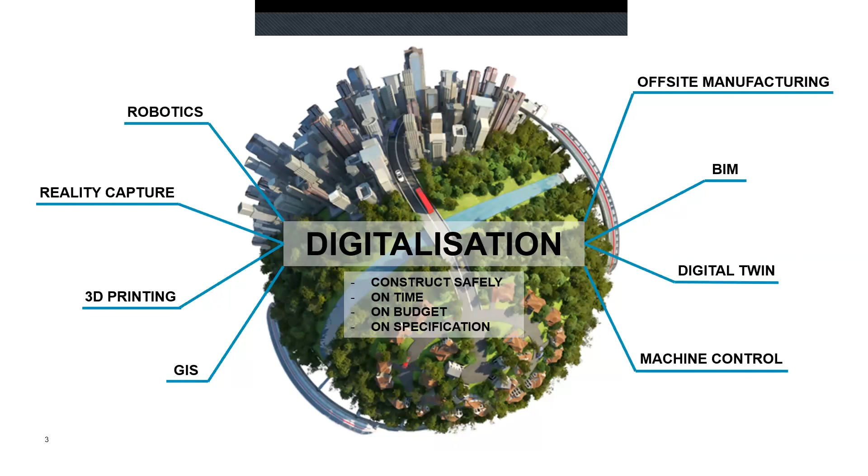But actually, as an industry, are we really digitizing? Are we investing in digital technology? So the question is, where does the construction industry rank in terms of investment in digital technology?

This was from a study from a few years ago. They analyzed 22 worldwide key industries, and ranked them on their typical yearly investment in digital technology. I don't know if you'd be surprised to hear that construction came 21st out of 22nd in terms of investment in digital technology. For an industry that has probably long underperformed when it comes to efficiency and delivering on budgets, this seems like a very, very low ranking.

To put construction in my opinion, and when I talk to my peers in the industry, this ranking should be much higher. Construction companies and the industry itself should be looking to invest more in digital technology, to modernize, to digitalize. But this is all about change, and it's about making changes within our industry, within organizations, within projects that I work. And ultimately, change is hard. It's not that you can go out and buy something and change immediately happens.

One of those ways we can do it is to look at new digital technology. Some of those, laser scanners or machine control devices, will help organizations to digitize.

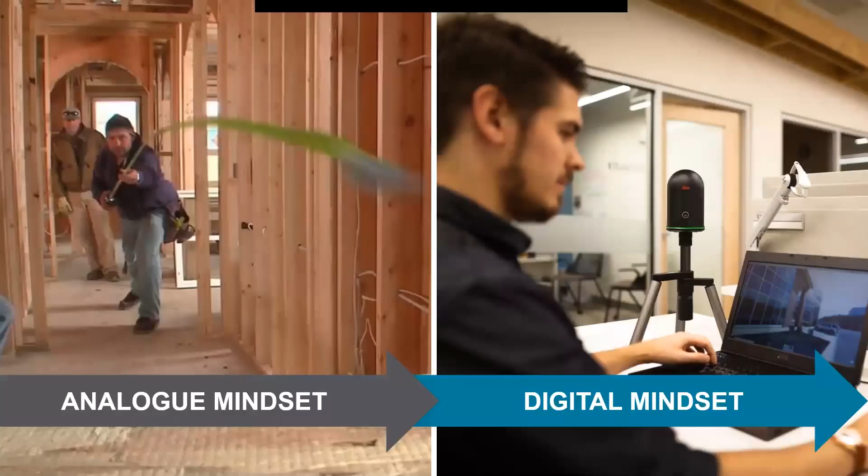So it's about moving from old ways of thinking, old ways of working, an analog mindset, to a more digital mindset. And as I said, this is about change—as much a mindset change inside people, inside a company.

If we look on the left, this person is trying to measure quite a long distance with a tape measure. Would you trust that measurement? Would you be able to understand exactly what he is measuring?

With digital technology like 3D laser scanning, like reality capture, which I'll talk about later in this presentation, we digitize this process so we can take smart measurements, smart decisions, smart information from the site, connecting these two worlds together. That's what we're talking about—these two worlds.

But how do we dynamically connect this to the real world? Because we have this chasm of lost information—we have a digital office, but are we using that smart digital process and digital information in the real world? How do we connect the office and the real world together to create almost a digital reality for our projects and our industry to use?

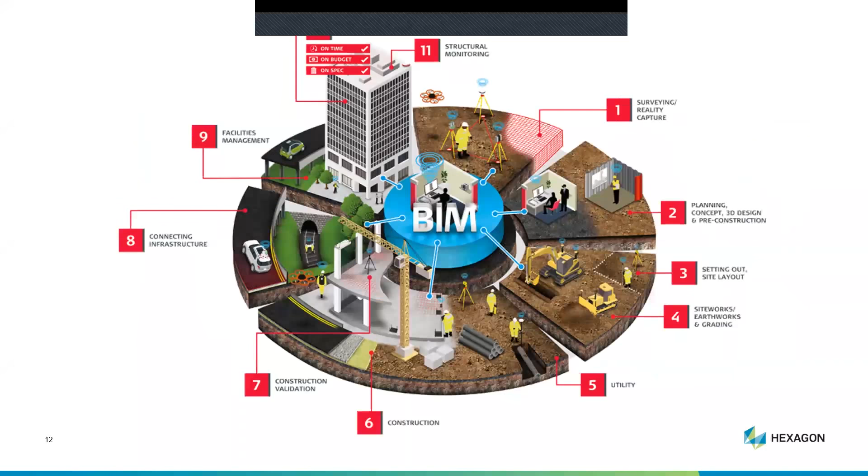A lot of this technology is already being used today, and it's about joining the dots between them and the digital office that we're starting to create in the world. With Leica Geosystems and Hexagon, we have technology, processes and workflows that allow you to connect the whole workflow from end to end.

So if we look at the top, we have phase one, getting the lay of the land. We have technology that allows you to capture that reality, all the way through to phase four, where we start using machine control to sculpt the land into the areas and volumes we need to construct our environment. Then we go to phase three, where we set out or stake out and position 3D data in the real world so we can put it in the right location and reduce error.

All the way through to facilities management, where we hand over an accurate 3D as-built digital data set of your project. And all this information, even though it's on the site, in the field, we can connect this to your BIM GIS digital database that sits in your project core in the office. It's a complete end-to-end workflow.

Going back to why do we want to digitize, why do we want to adopt new technology? Ultimately, it is about being able to deliver projects on time, on budget, and on specification. If you can look at any new process or technology and it delivers on more than one of these things, this will help you become more digital and deliver your projects to a higher standard.

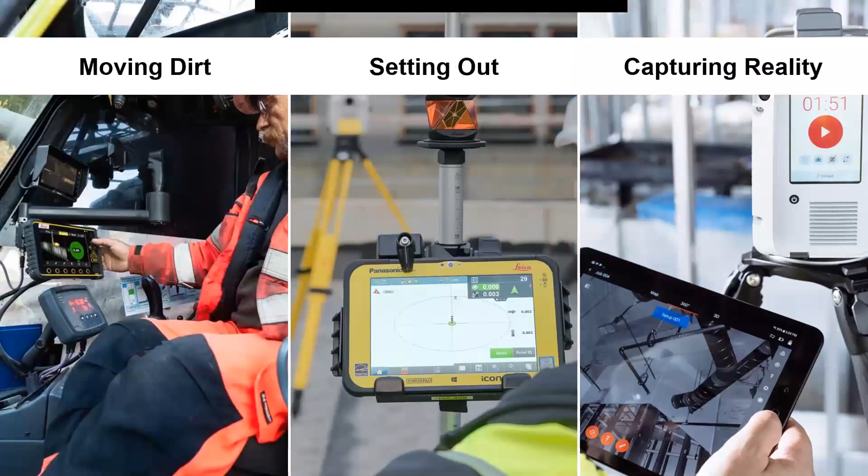So there are three categories I want to talk about today, and hopefully you'll learn something about new technology that isn't five to ten years in the future. This is technology that has either been around for quite a number of years, and most of this technology is now being adopted more and more all over the world to digitize what were analog workflows into more efficient, higher quality deliverables for customers.

Firstly, I'm going to talk about moving dirt, focusing on a technology we call machine control. Maybe it's something you've never heard of before. Basically, think of any construction site, whether it's a building, pouring concrete, heavy construction, building a bridge or a road - the project is using excavators, bulldozers, these heavy machines that allow you to move dirt and objects around your site. Up until maybe 10, 15 years ago, this was a very labor intensive, labor focused workflow.

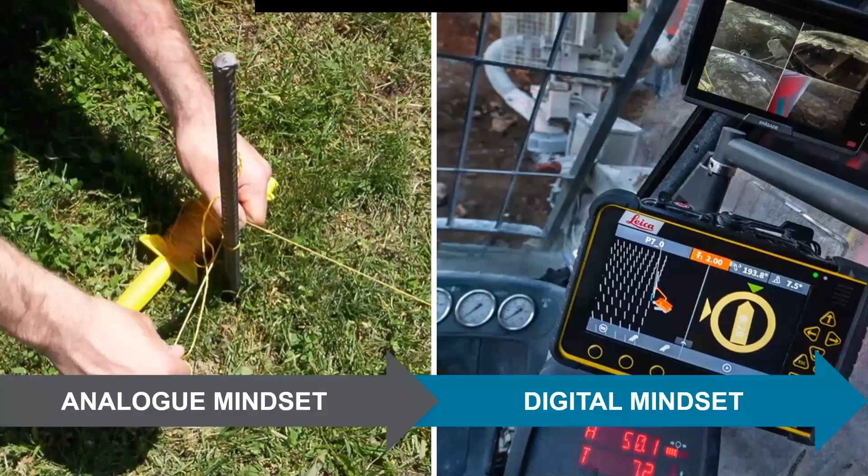But now, with the adoption of digital technology, if we look on the left, we had to actually show the human operating the machine where they had to dig, where to put their bucket. This meant people had to go out and put stakes in the ground. They had to be around the machine, and the person had to visually understand where he was putting his bucket, where he was digging, where he was moving dirt or equipment around.

Nowadays, with machine control, we can install inside these machines guidance systems, almost like a computer game. We attach sensors to the machine, and we're able to take 3D and 2D digital data into the machine. This screen you're seeing on the right-hand side basically shows the operator exactly what they need to do. Why do we need this? Well, it's ultimately making sure that what's constructed on site exactly meets the design, and people are not wasting time digging in the wrong location or trying to find where exactly they need to dig or move dirt.

All this kind of thing can be shown to them on a very easy to understand screen. So what does machine control actually look like?

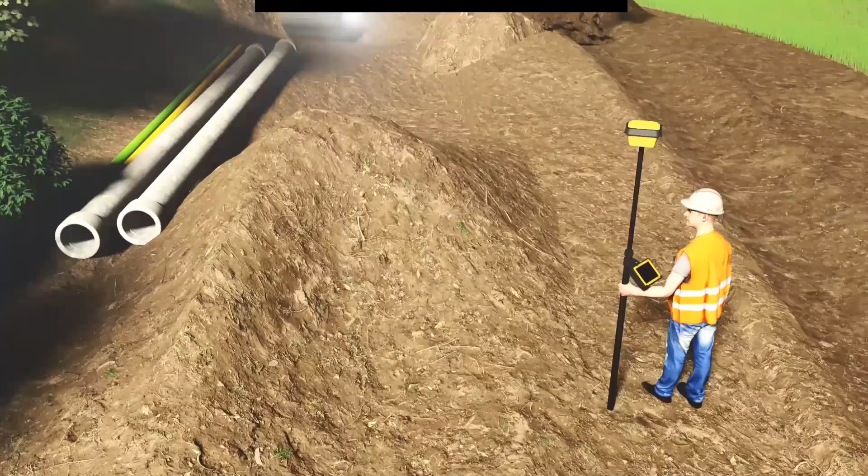As I said, we install sensors that allow you to understand the movement of the machines. This includes GPS, GNSS, so the machine can actually understand its location in the world. In the office, you have these amazing 3D models. We can take those 3D models and send them directly to machines. The person operating the machine will then see the 3D model on his instrument, and even the people surrounding him helping him out.

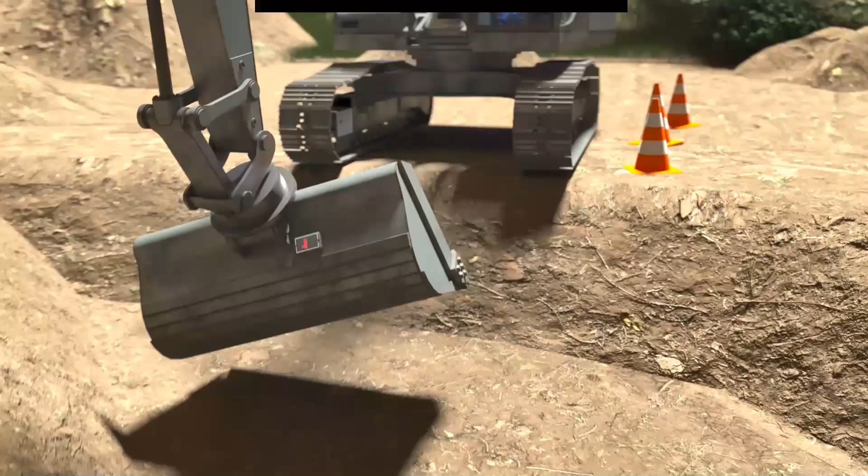And the sensors will guide the operator to dig in exactly the right location. Ultimately, this is about efficiency and safety. Being able to guide someone to dig exactly as much or as little as they need allows our projects to save a huge amount of money and time by being much more accurate with the amount of dirt they're going to dig and move.

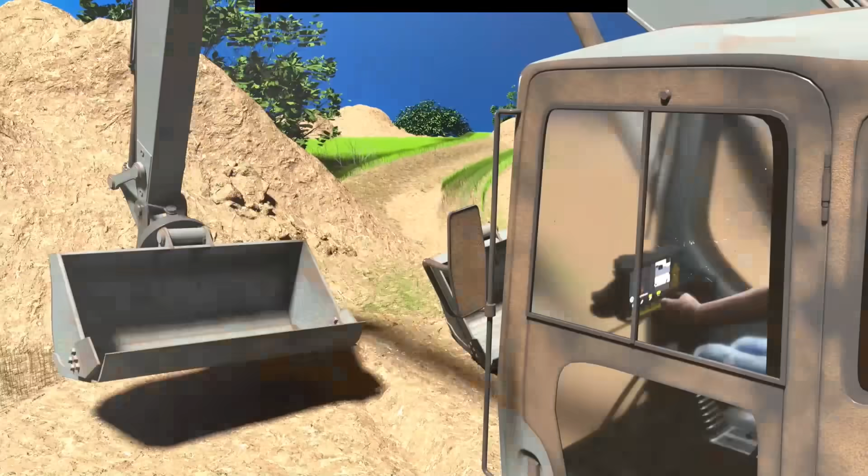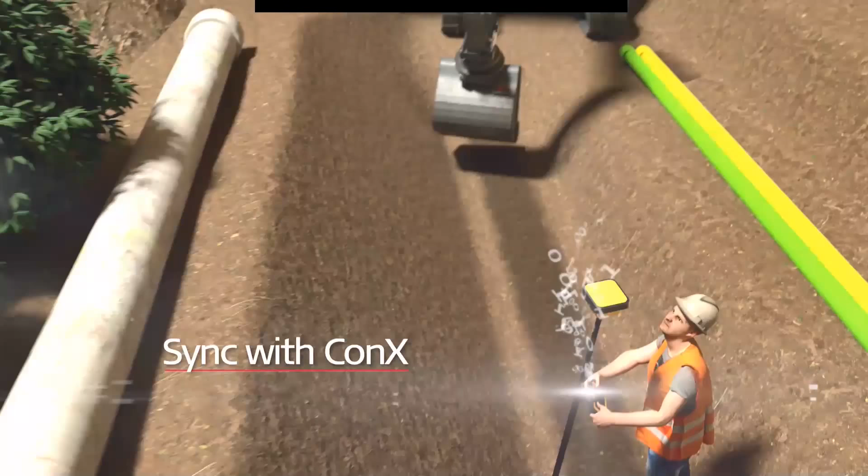This is an example for an excavator, but these machines can be installed on piling rigs, on cranes, on bulldozers, on pretty much any sort of construction equipment, allowing you to save huge amounts of time and effort on these huge construction projects. And it doesn't necessarily need to be huge - these can be installed on a single excavator or digger.

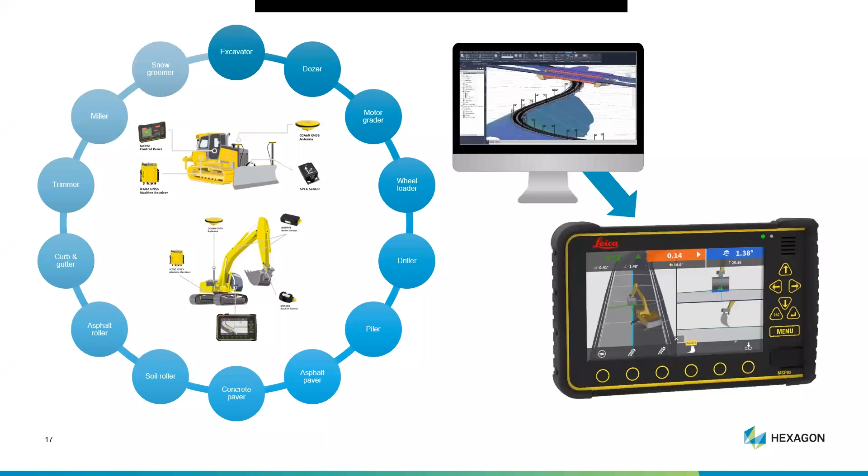As you can see on the right-hand side, we take data from packages like AutoCAD Civil 3D, Bentley MicroStation, any of the 3D standard packages. We can take that data and send it to the operators in the field, and they can start moving, excavating, and constructing exactly as planned, saving time and effort.

The next one I want to talk about is called setting out or staking out. Again, this is about the fact that we've taken our data and now have a digital representation of our project. We want to construct that project in the real world - how do we ensure we do that? If we're using AutoCAD, how do we take these drawings to site to make sure we construct in the right location?

If we've got 3D models now, maybe modeling in Bentley or Autodesk or Revit, and we want to take those models to site, how do we take them to site and use them on construction sites to make sure we construct exactly where we have to, avoiding any costly mistakes?

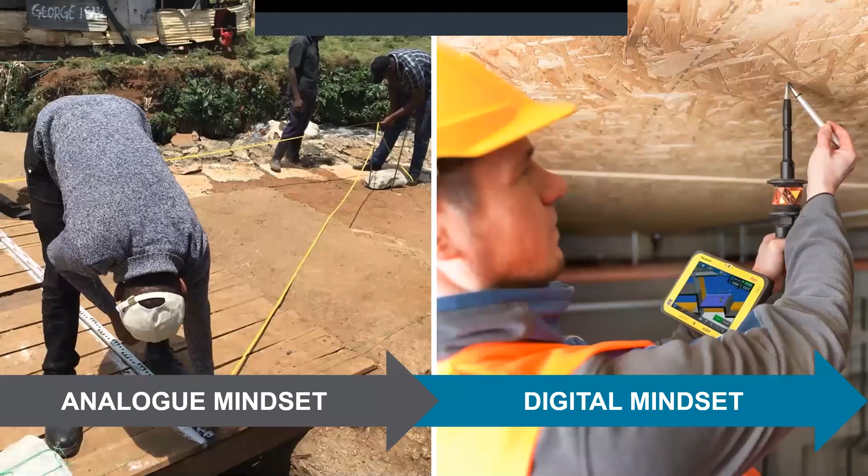If we look at the analog mindset, today on most construction sites, wherever you are in the world, tapes and strings are commonly used to do this setting out, staking out, or laying out process. What they're doing is essentially calculating in the field exactly where things need to be dug or installed in the real world. Normally this is done through a quite labor-intensive process of tapes, strings, and calculations.

What does this lead to? Well, it often leads to a lot of mistakes. It often leads to the fact that if one of these pegs is removed, you have to do the whole staking out process again.

Nowadays, with new digital technology, we can use things called robotic total stations. These are basically devices that allow you to take digital 3D and 2D information and actually position things in the real world based on this robotic total station. In the picture on the right, you see a guy holding what looks like a red reflective object.

This is called a prism, and he is being guided by the robotic total station to locate a hanger into this roof structure. He is now within a few millimeters of locating where this object needs to be installed, and this is all driven by the robotic total station. There's no need for tapes or strings. The total station tells him exactly where he needs to go.

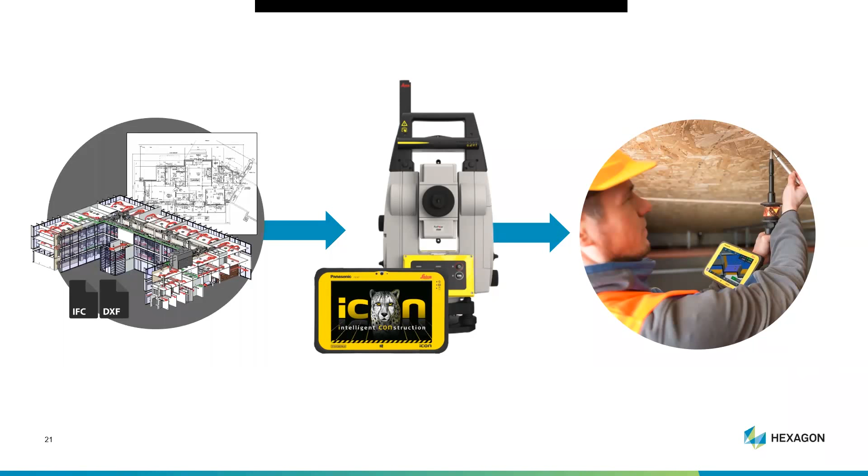For example, an MEP company - mechanical, electrical, plumbing - may have to install thousands of hangers to hold these devices, and they have to locate thousands of holes on the ceiling. With this device, you can tell it to point at every single location so you can drill as you go. If it's labor intensive, there's a high probability of errors - it's normally inaccurate and problematic.

In the middle, you can use a manual total station, where you need two people to do the setting out. But on the far right is the robotic total station. This device will point you exactly where you need to be. It's a 50% reduction in labor, and you'll be far more efficient and accurate when setting out 3D and 2D data in the field.

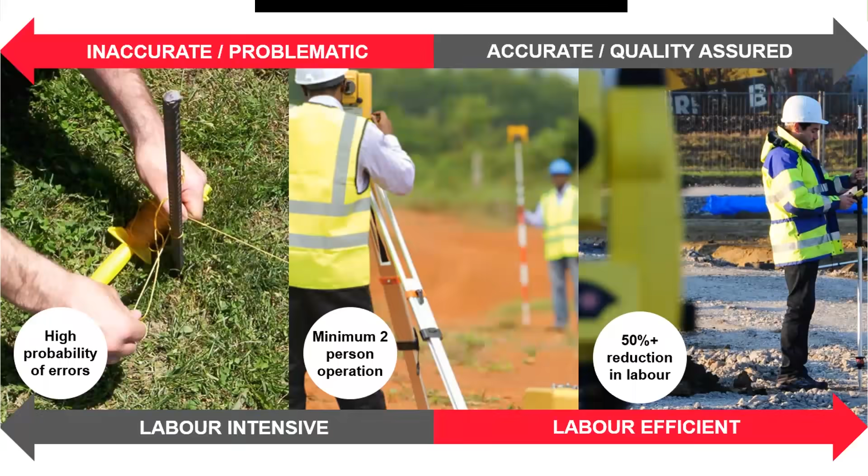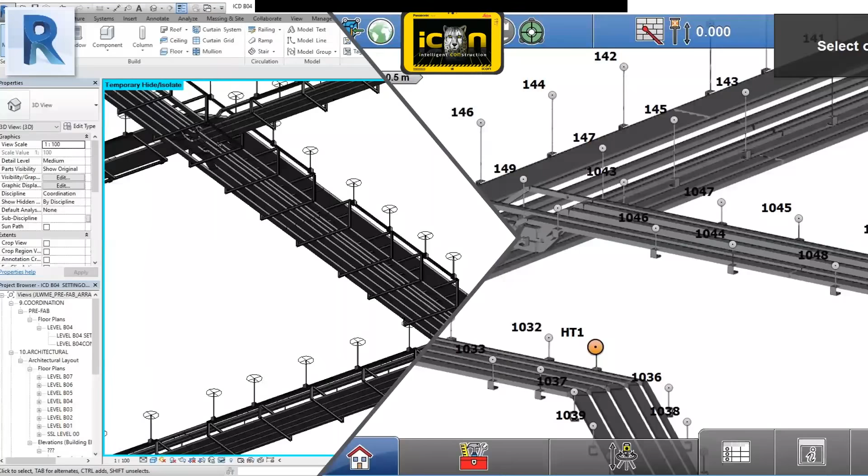On the left-hand side we have a model inside Autodesk Revit - an MEP model - and you can see these weird crosses on top of the hangers. These are layout points. We can take all that information via USB or a cloud service and send it to our instrument in the field. There, we can see that data in 3D and start setting out directly from the 3D model. We do not need any intermediary steps.

We can get to the information we need to start setting out and laying out information on your construction site as quickly and efficiently as possible. If there are any changes, that data can be resent to site, and these guys can get the new information and continue setting out without losing any downtime.

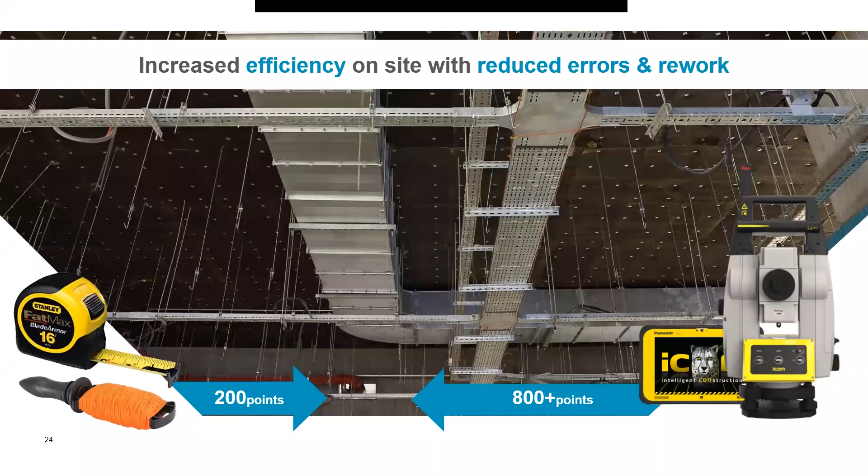It uses a laser - we call it reflectorless - which allows you to show on an object or surface exactly where a hanger needs to be drilled, or exactly where a concrete slab needs to be laid. This laser lets you do this remotely, again improving your efficiency and allowing you to do your job in a much smarter, more accurate way.

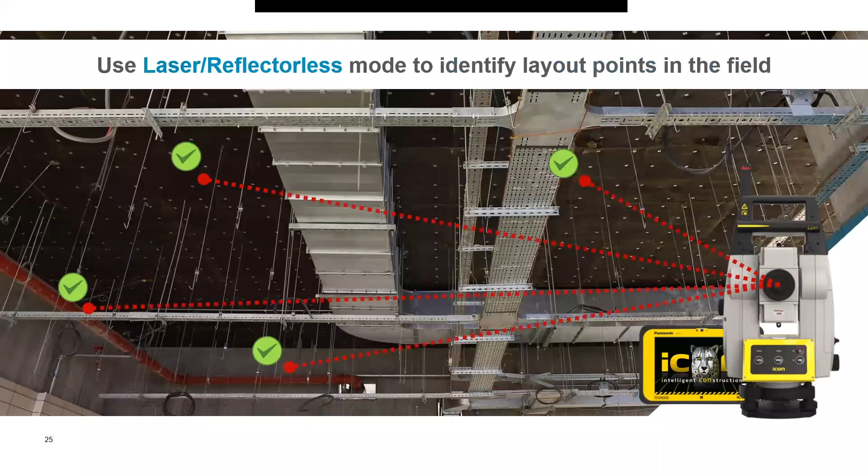We can connect to things like the BIM 360 cloud and allow you to draw down this 3D information, so your operatives in the field can see the 3D data and start setting out directly from it - improving performance and reducing the chance of costly mistakes.

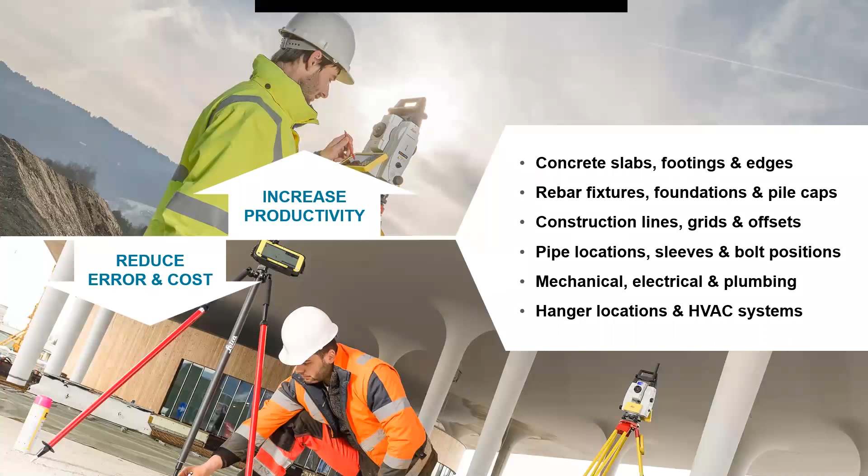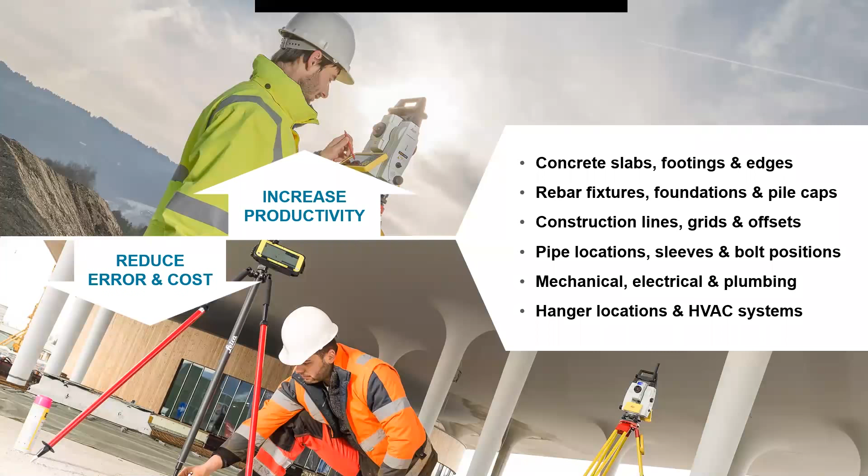What can we use it for? Just a few examples: rebar, pipes, mechanical, electrical, plumbing, positioning hangers. Really any construction task, whether building or heavy construction, will require some form of setting out or laying out. Nowadays, moving to robotic total stations is proving invaluable to the construction industry because it allows you to digitize what is quite an outdated and analog process, reducing error and cost and increasing productivity.

The final thing I want to focus on is capturing reality. It's about using technology that allows you to create this digital reality, connecting the real and digital worlds together in a smart and intelligent way.

Traditionally, how do we measure reality? We use things like tape measures and cameras to record our reality. If I have a project and want to capture what my building or infrastructure looks like, I go out there and capture it. Using technology like 3D laser scanning, we can collect this information in a much smarter way than ever before.

So what is reality capture? It's maybe a term you're familiar with, or maybe it's new to you. With reality capture, we use sensors like photographic imagery, laser scanning—basically a laser measurement device—as well as thermal images. We turn that into reality captured, using all this technology to create a digital reality. We basically make reality machine readable.

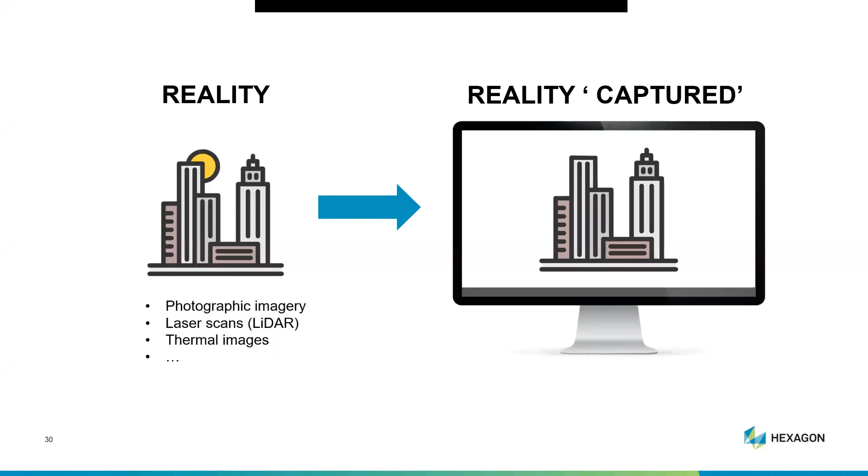Why is that important? Well, 60% of today's buildings will still be in use in 2050. That means most buildings and infrastructure being used today will still need to be refurbished, renovated, upgraded, maybe expanded over the coming 30 years to keep up with the needs of modern people. Being able to capture reality helps us understand what the real world looks like so we can digitize and create a smarter digital construction process.

So on the left-hand side, we have a collection of reality capture sensors—different things that allow you to measure and take pictures of reality. We use that to create what's called a digital reality in the digital office, allowing you to virtually visit site and understand what reality looks like in your project.

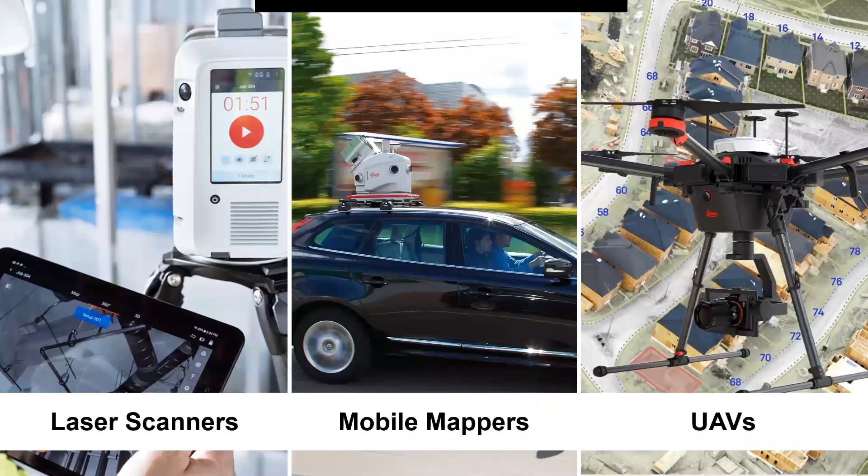What is reality capture actually made of? For Leica Geosystems, there are three main technologies. One is laser scanning—a device that normally sits on a tripod, spins around, fires out millions of lasers, and takes 3D measurements of what's around it. We call that a point cloud. A laser is fired out, hits a surface, and we record a measurement—not just one per second, but these scanners can measure 2 million times a second, so it's very quick to capture a 3D dataset.

In the middle, we have mobile mappers—similar technology, but mounted on a car or in a backpack, or even a handheld device that lets you walk or drive around and capture 3D data of the environment. Finally, on the right, maybe more familiar to you, are drones and UAVs—airborne vehicles used to capture 3D or 2D information of the world around us. A combination of these things captures the reality of most projects we have around the world.

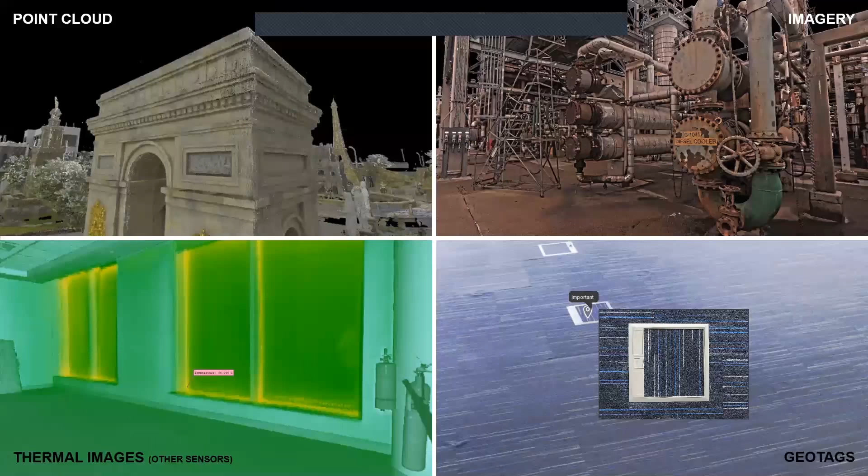So what do we actually capture? In the top left-hand corner, this is what we call a point cloud—millions and millions of 3D measurements in space, accurate to a few millimeters, created in about a few hours, giving us this complete 3D dataset of the environment we've captured.

On the top right, we capture imagery. This is why in the point cloud we have these colors, because we've taken a picture. In the bottom left-hand corner, we could also incorporate other sensors like thermal images. Why would that be useful? Well, we can start to understand the thermal properties or the thermal loss of some aspects such as windows or roofs when we start to capture this 3D information.

We also have these things called geotags. Geotags are basically additional information that can be added to this reality capture data set while you're capturing things in the field. These could be images, PDFs, or other documents that you add to the information. When do you use reality capture?

So there's actually 3 phases. Firstly, before. So before your project has really started, what do you want to do? You want to get a lay of the land. You want to understand what your road or your environment looks like, what your building looks like. So you can go out there, use mobile mapping, 3D laser scanning, and collect this type of data, this 3D point cloud, accurate to millimeters, of the building you are going to refurbish, renovate, or build nearby.

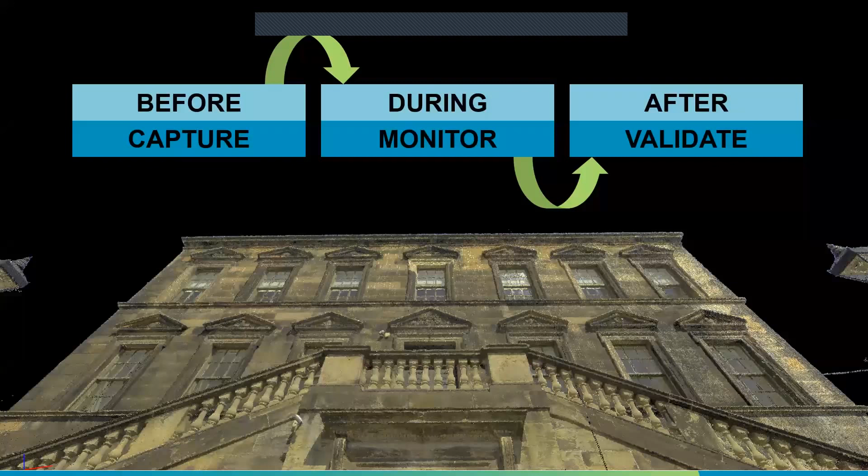What can we use it for? So in this example, this is a point cloud. This is being used in a free piece of software that allows you to take measurements and walk around the point cloud you've captured. Why would this be useful? Well, if this project was in America, and I'm situated in Dubai, I want to understand how big is the opening of that structural wall, how wide, what is the area of this floor.

I don't have to call someone, I don't need to visit America. I can open up my point cloud, virtually visit the site, and take digital measurements. I can see in 3D exactly what that project looks like with minimal effort, minimal time, and minimal cost. And I can get these millimeter accurate measurements just by clicking a few buttons.

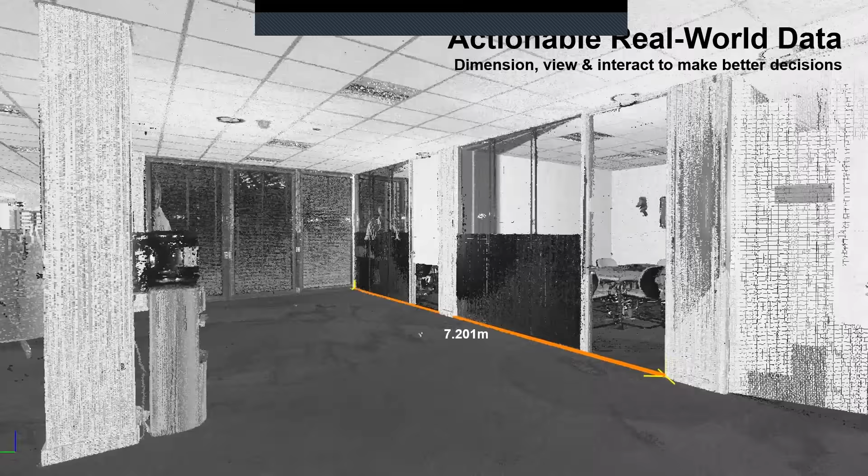I can even add additional information and take high resolution images. I can capture all this digital data before the concrete is poured, before plasterboard walls are put up, so that I have a digital record I can come back to later if there's a problem, if there's potentially a legal problem, and I can say, okay, here's my data. I can prove that I've constructed something in exactly the right location because I've got a digital record of it.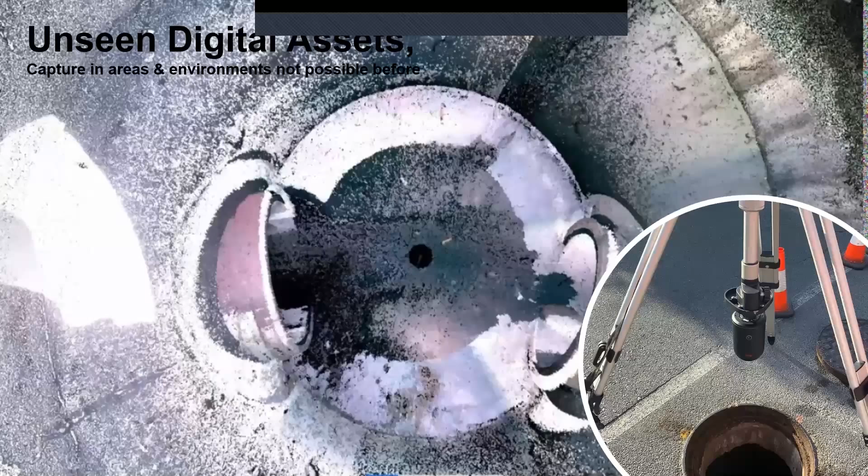It's not just normal circumstances where we can use reality capture. This is an example of one of our scanners, the BLK 360, being pushed down a manhole to scan underground assets. Some areas are very difficult to get real world information. These scanners weigh about 1 kilo, about the size of a Starbucks coffee, and you can put it above suspended ceilings, invert it and scan below ground. These things give you valuable, accurate information on your reality. Using this information allows you to get accurate as-built information on your project so you can design and make decisions based on accurate real-world information.

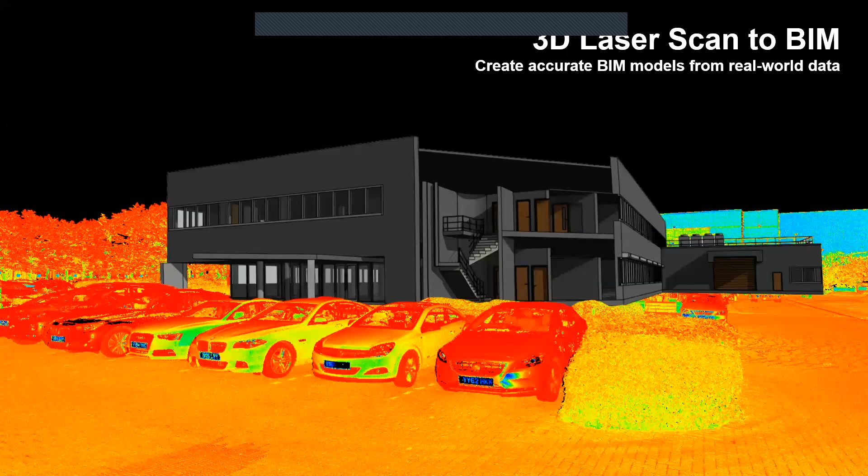One of the most common things we see, particularly with building information modeling (BIM), is this scan-to-BIM process. I have a project, I need to refurbish or build something on a site. What I want to do is go out there and scan it to create an as-built model of my existing building. So we can take our handheld scanner or our terrestrial laser scanner, tripod mounted, go out and scan this building, take it into products like Autodesk Revit, AutoCAD, Navisworks, Bentley MicroStation, really anything, and start modeling directly, using this a bit like a dot-to-dot.

We actually have tools that allow you to auto-fit components to the point cloud. If you scan a rectangular or circular column, we have functions that allow you to click on that column and it will automatically fit a column to that point cloud, giving you accurate as-built information from that reality.

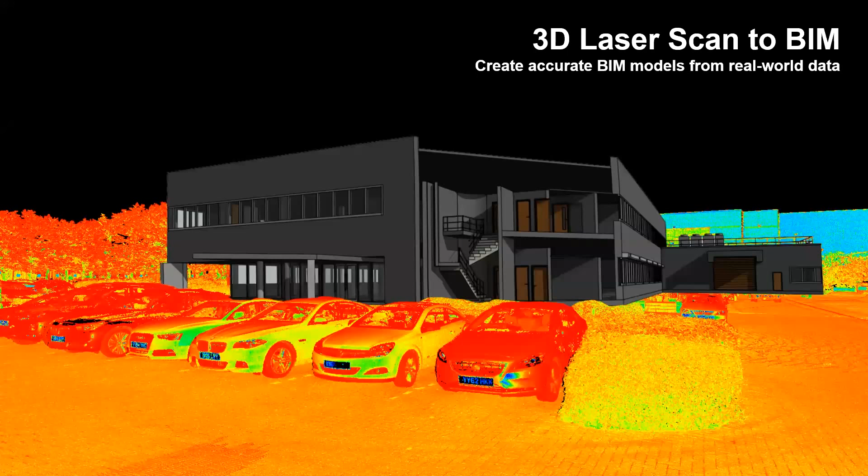Again, this is all aimed at capturing reality to make smart decisions. It's understanding reality so you can avoid costly mistakes that may occur downstream, or so you can design and project manage your project in a much better, more accurate and smarter way.

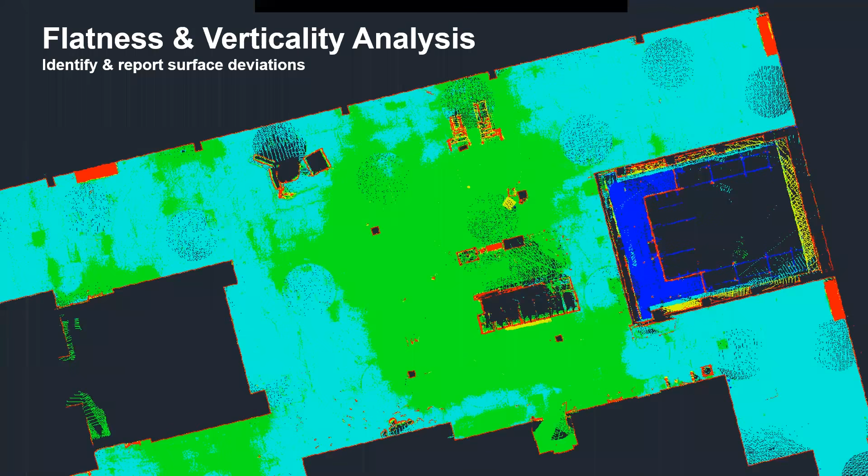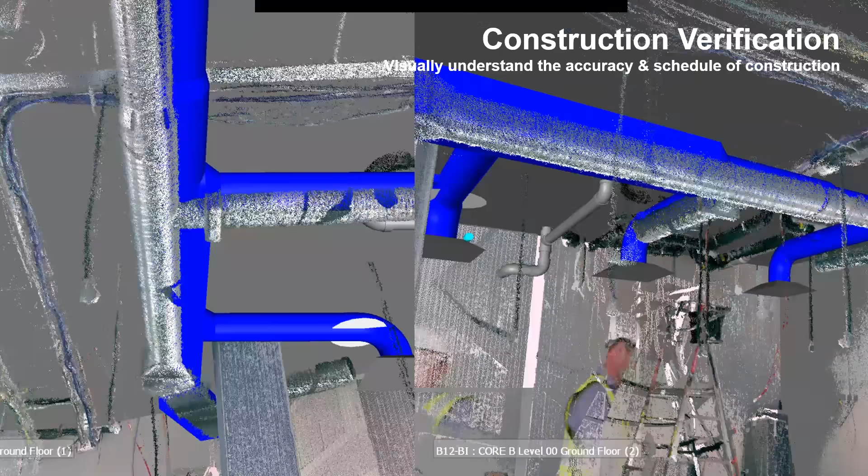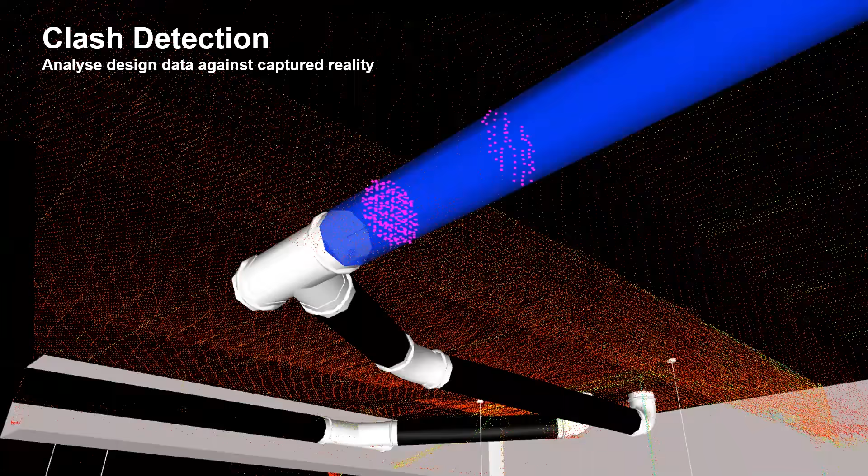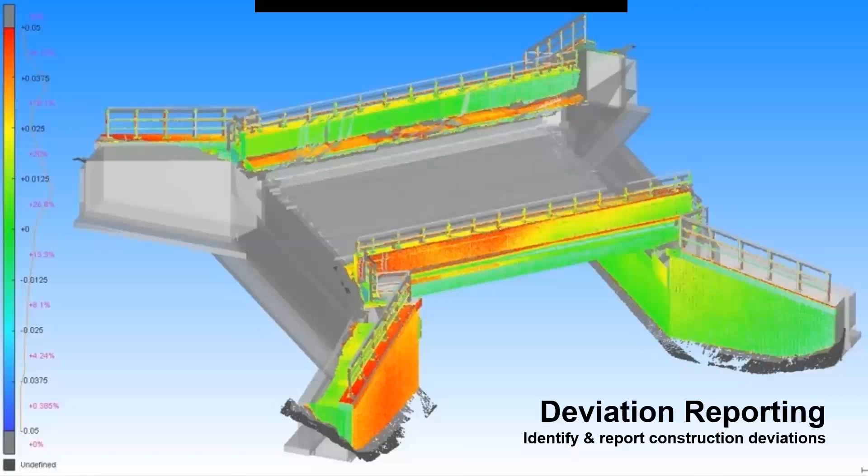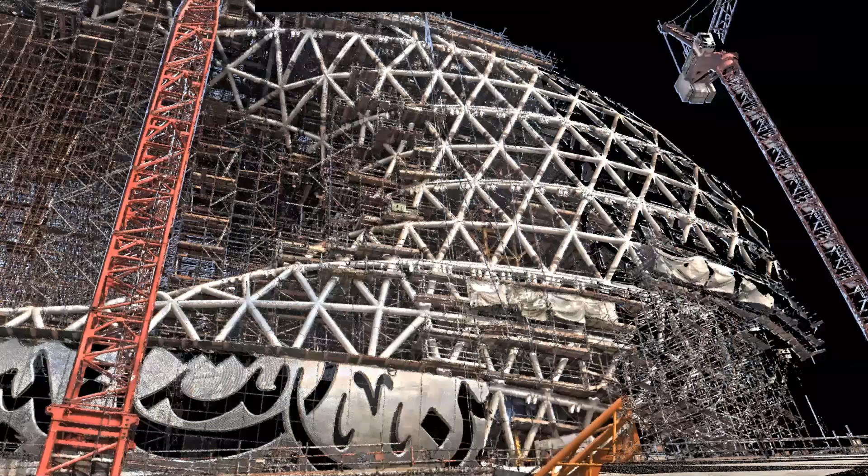This is a complicated construction, and if you look on many Autodesk, Tekla, and other websites, they usually use this as an example. They used a lot of BIM and smart design technology to make sure they designed and coordinated this project perfectly when they went to construction. But how did they make sure construction was correct? Well, they scanned it. So that was the picture of the Museum of the Future halfway through construction. This is a picture of the scan data they captured at exactly the same time. It looks like a photo, but this is actually millions of 3D points that you can fly through, navigate around, and take measurements from. This was probably captured in maybe 5-10 minutes of work to capture this amount of information.

So what did they do with that information? Well, they validated the construction against the design model. They had very tight tolerances, very accurate 3D models and 2D designs. They took their 3D point cloud - I don't know if you can see it, all this point cloud information around here - and they were comparing it against the 3D model on a regular daily basis, so they could understand where potential deviations were happening. So they could either fix them before they became a problem, or make changes to the design or construction process to understand what was going on.

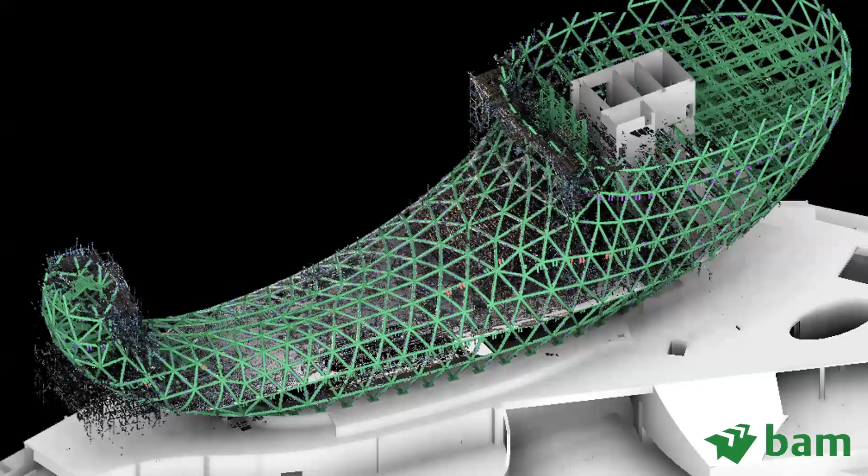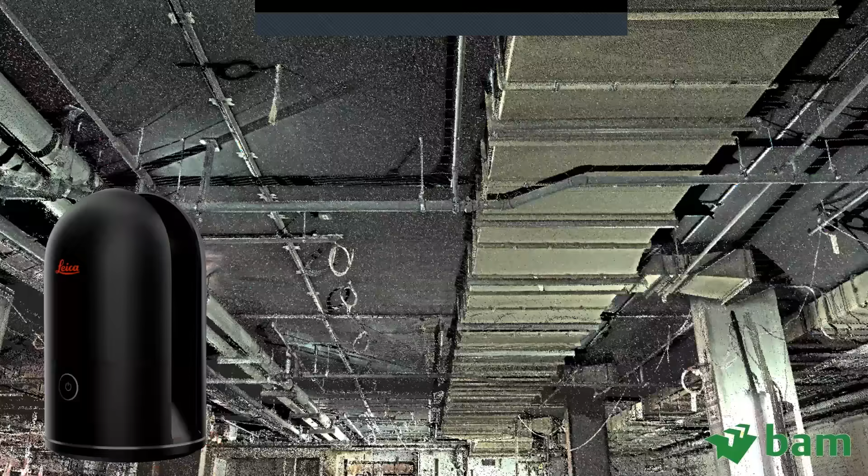But it wasn't just the outside that they scanned. They wanted to make sure all the mechanical, electrical, plumbing, heating and ventilation system was accurate, was in the right location. So what they did is take one of our other scanners, our BLK 360, our smaller lightweight scanner, and they would scan the interior of the museum. They would basically validate the location of all the installed MEP on a regular basis, to understand whether their subcontractors installing the MEP were putting it in exactly the right location.

What tends to happen on construction sites is these may not be installed in exactly the right location. Then another subcontractor, one or two weeks later, will come in and the design has told them to put it there, but they can't because a previous trade or subcontractor has put something in the wrong location. They wanted to avoid the cost that incurs on every project.

So what they did is they scanned on a regular basis and would basically tell their subcontractors whether they were on spec or had to make adjustments to what they had done on site. This was a huge success for them in terms of making sure the museum structurally came together, and that all the MEP was assembled and installed in the right location, at the right time, and to the right specification.

With that, I'd like to come back to one of my first slides, which is about change, and say that hopefully you've seen a few examples of new digital technology that is already being used today by many companies around the world. That was just one example of BAM construction in Dubai.

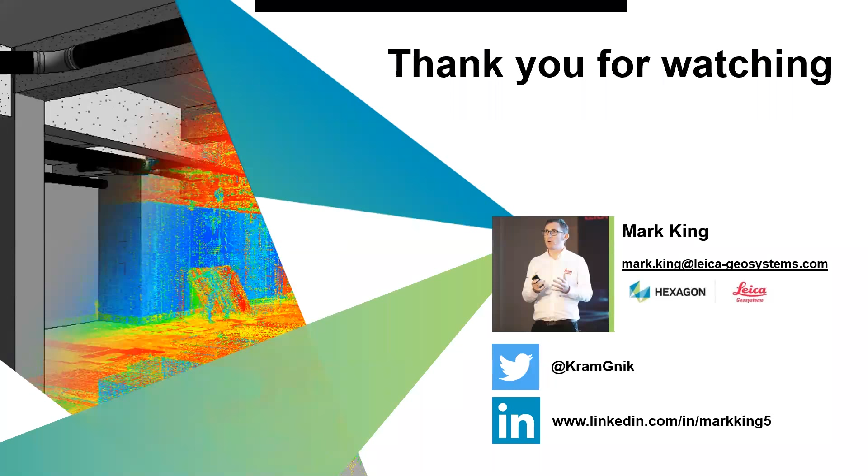Will you give training for using this technology, and what is the cost of all the basic equipment? So yes, we give training. We sell direct in some countries, but in most countries we have dealers as well, and if we or our distribution network sell technology, they provide training with it. We never sell equipment without training - that's always part of it, as I said, people and process. As for the cost of the basic equipment, it really depends on what equipment you're talking about. If you want to know the cost, please reach out to me via email or social media, and I'd be happy to give you a call to talk about exactly the technology you're interested in adopting.